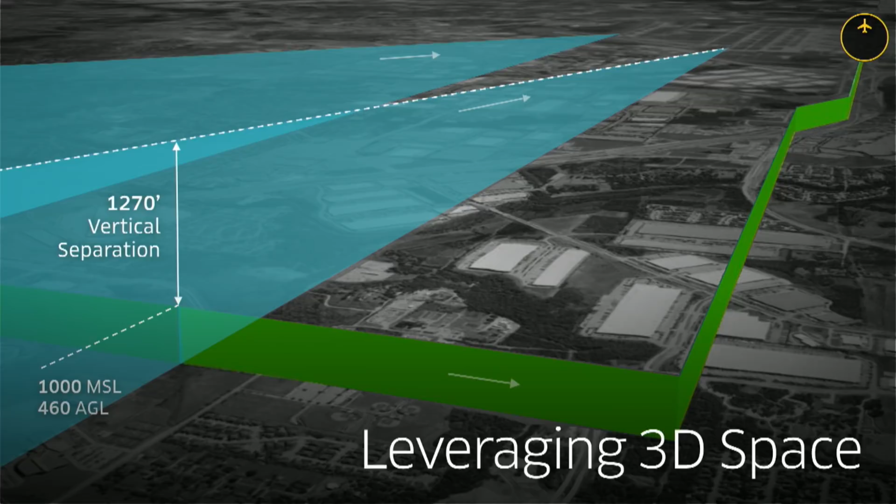And that turns us to 3D space. We need to compete against cars both on cost of time and on money. So autonomous vehicles will be able to reduce the cost of the trip on the ground, but we will not be able to really attack the time cost savings. The only way to do that is to look 3D, because roads are inherently two-dimensional, and they already use up super valuable real estate and are constrained. So opening up to the sky cracks this geometry problem, because you can both go horizontally and vertically.

Doing this is also doing it in a smart way, because the air travel that we're imagining is capital light. If you think about it, in 1993 the 105 freeway opened here in LA to serve LAX. Planning started in the 1960s. It cost $5 billion in today's dollars for about 17.3 miles.

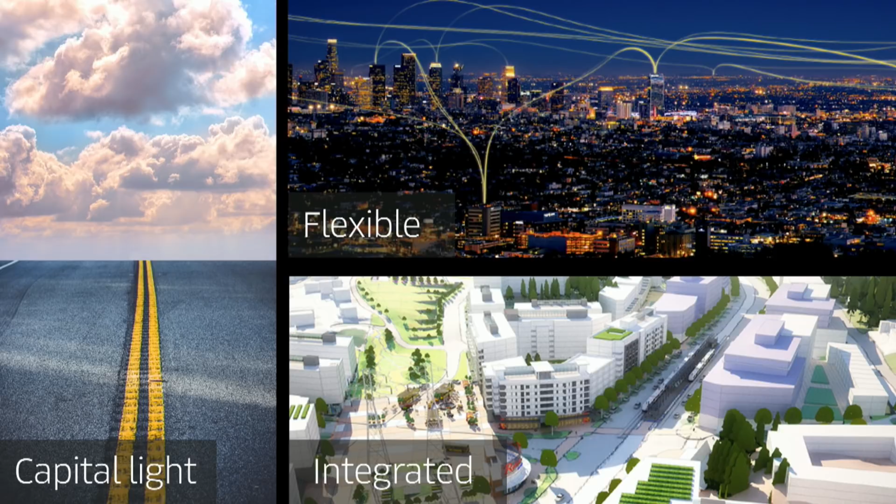Unlike roads, air doesn't require construction or maintenance, so it eliminates the need to build that out in that same way. And skyports can also be developed faster, as part of real estate development, and can be done in a decentralized manner, slowly building up, and you continue to accrete value.

It also inherently integrates land use, by having the skyport built in with the commercial or residential real estate. So we can change rooftops into parking, we can change the parking on the ground into parklets, and we can have a much better use of land space.

And finally, it's very flexible. Cities are constantly changing. They're complex. It is tough to predict what neighborhoods will become big next. And so we can adapt very easily without having any fixed routes. It also allows us to invest in neighborhoods where we think there might be a potential for growth in a lower risk, lower capital way.

This increased bandwidth will have major implications. We will have longer trips. People may be willing to be induced out of their cars and share in the sky because of the time savings. Also, when you compare our model of air travel, it's always been shared. And if you look at larger commercial aviation versus this sort of vehicle type of travel, it will be much nicer. We'll unlock people's productivity lost by congestion.

People who have been priced out of the city as real estate prices continue to go up will continue to have access. Mega cities, which are getting sprawling and more congested, will have connectivity. And medium-sized cities that are near each other will be able to be linked in ways that will allow them to function like much larger urban areas.

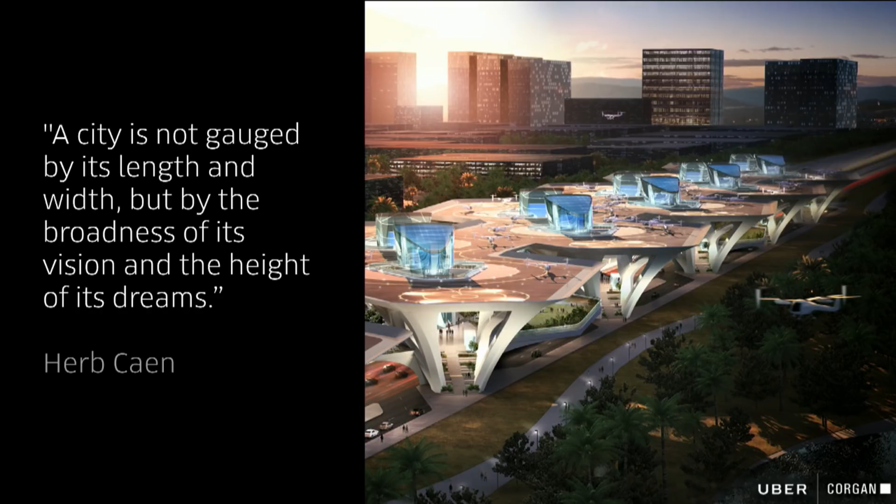We're not looking for tax breaks or local incentives, just identify a city with a strong vision who is investing in their future. So if you know of anyone who might be interested, or if you're a city yourself, we will be publishing all of this information at uber.com/air. And we want to hear from you either to our local policy team or to the Uber Elevate team directly by July 1st. And we're really excited to start that conversation globally.

With that, I want to change gears and introduce our next session, the Lightning panel session. We've talked to you a little bit about how we, Uber, think we can help cities, but there's so much opportunity. And what you'll hear from our next 6 fantastic speakers is their vision of how aviation technology, new mobility solutions will change and help cities in a variety of different ways. So with that, I'll turn it over to our next speaker to each share a 5-minute vision about what they think that world can unlock.

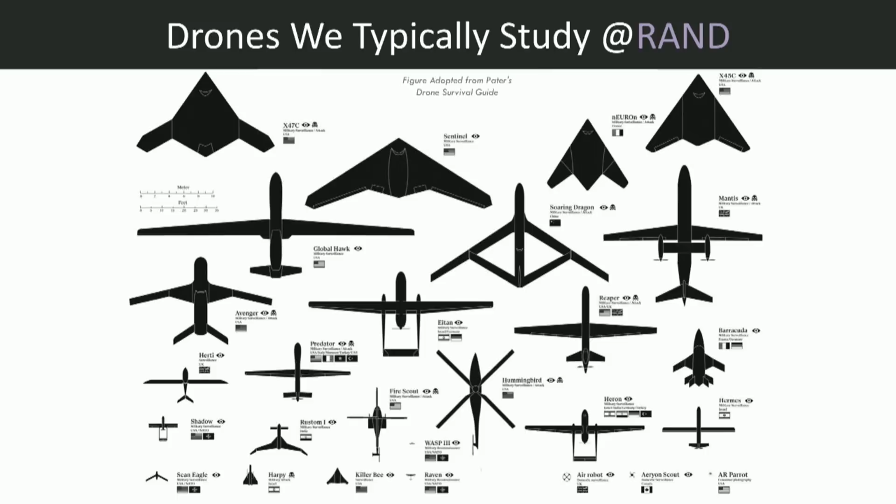And one of these topics that we've decided is important to look at is drones. That's why we're here. And RAND is most famous for drones like these military drones. Over the last several decades, we've done a lot of work there. But obviously, everyone here knows that these urban mobility situations, delivery drones, which we're going to focus on in this talk, but then eVTOL as well, are becoming important realities and issues that

policymakers need to address. And so some of those issues are the design of the drones, the logistics and the operations, the airspace issues, and potentially privacy issues. But we have small reports on all of these that we've put out. I've specifically worked on the operations, so that's what I'll talk about today.

And the way that I went about that, it wasn't originally set out to be this, but it ended up seeming that making mathematical equations was the best way to address these issues. And so these mathematical equations incorporate things like the ground transport and the aerial transport, and then we validated as much as we could with the data that was available to us, far less than obviously what Uber has available to them.

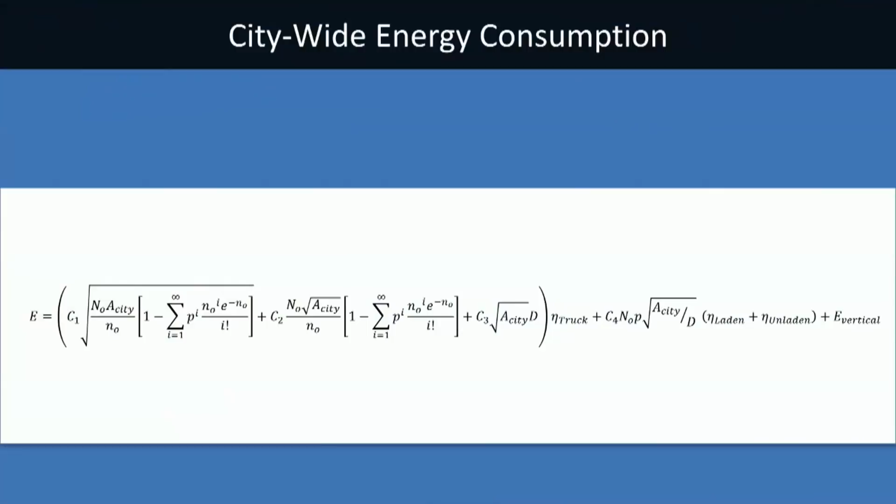But the first issue that we wanted to address with these equations was the city energy consumption for delivery drones. If delivery drones can proceed at this scale, then what sort of energy would be used as compared to the current status quo? And so we get these big, long equations. This one's kind of condensed, but it's really not as bad as it sounds. It's all the stuff you would expect, things like the trucking distances and the energy to restock your drone centers. How far do the drones fly, vertical lift, efficiencies on the drones.

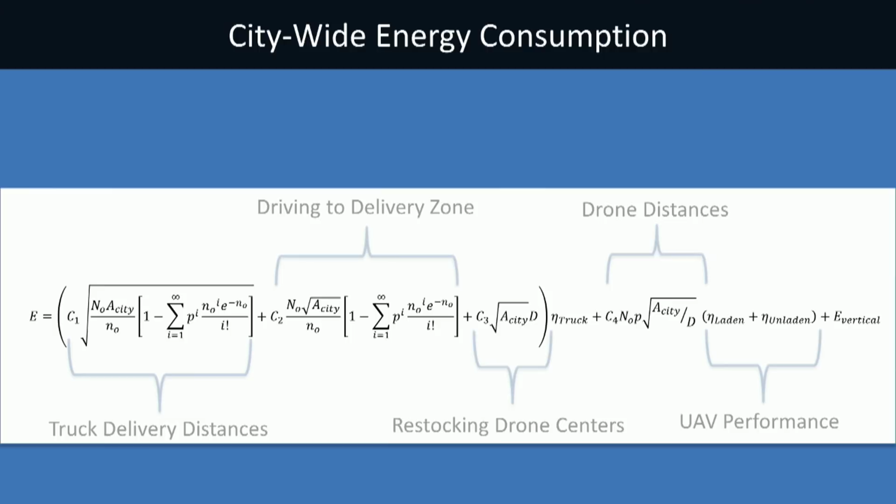And so the interesting thing here is that it tells you what the important variables are for policymakers. If they're concerned about something, what are the variables they can tweak to have the most impact? But it doesn't tell us the scale, and so in order to understand the scale, we applied this equation with some rough inputs that correspond roughly to a variety of cities: Los Angeles, Tokyo, Kigali, and Minneapolis.

And then we can take a look. You just plot the graphs. This is the fraction of drones. So as you scale up the percentage of drones delivering in these different cities, what are the impacts? And what we're seeing, originally I was pretty skeptical. I didn't think this was going to be possible.

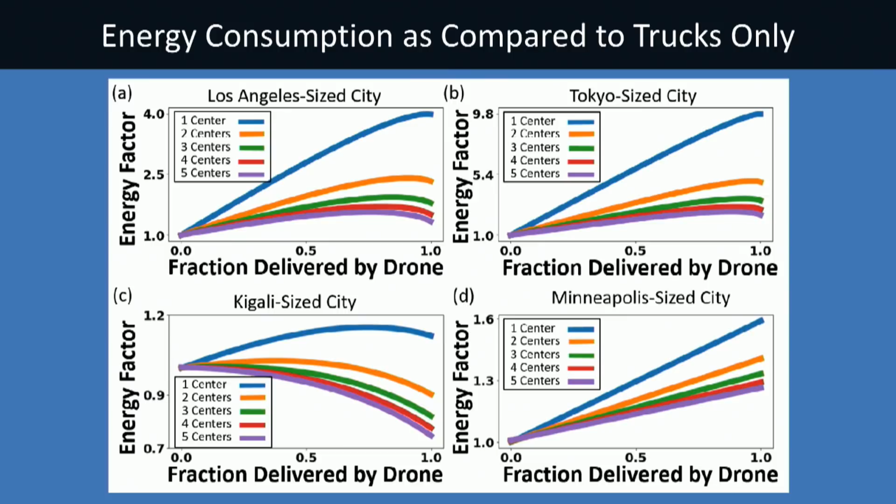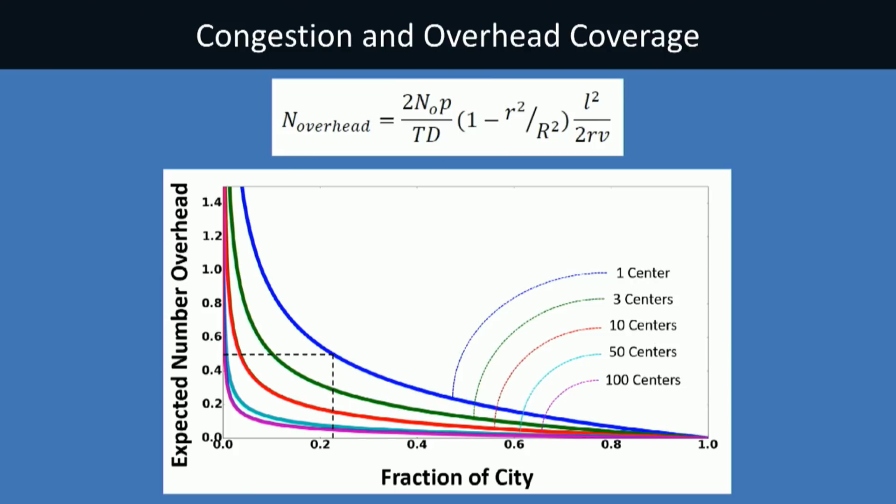And so what we're showing here is the fraction of the city that will have some number of drones expected at any one time within their viewing radius. And we're talking about, for a city like LA, maybe a quarter of the city will have a probability of like a half of a drone overhead at any given time. So certainly not blocking out the sky. As you get closer, it'll be higher. And then obviously, what I'm showing here is that if you increase the drone centers, that helps again to bring down the overhead coverage.

And so just to wrap up really quickly, there are a variety of things. First, we really believe that just rough first-order analysis like these can help give policymakers an understanding of what the scale of the problems are, understand what are the issues and what things are not actually issues to deal with. We're showing that delivery drones appear to make sense in at least some environments, and maybe in all.

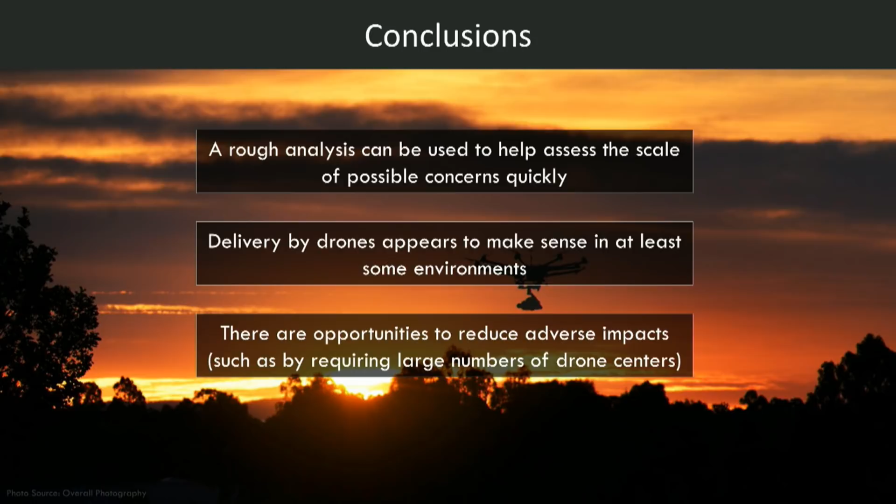And I'd like to reiterate that this approach, these equations, can help to identify what are the real impacts from the things that are not, what are the options that policymakers have, and what will be the impacts on people, on the folks like you. And so what we're trying to do, this is all delivery drones, we're trying to extend out to eVTOL and people movers. The same sort of analysis could be very useful.

The policymakers will know which issues are important, which ones are not important. They can say which variables to change in order to address those issues. And they'll also know, if they make those decisions, what the impacts will be like for people who are trying to design the aircraft, design the batteries, design the skyports.

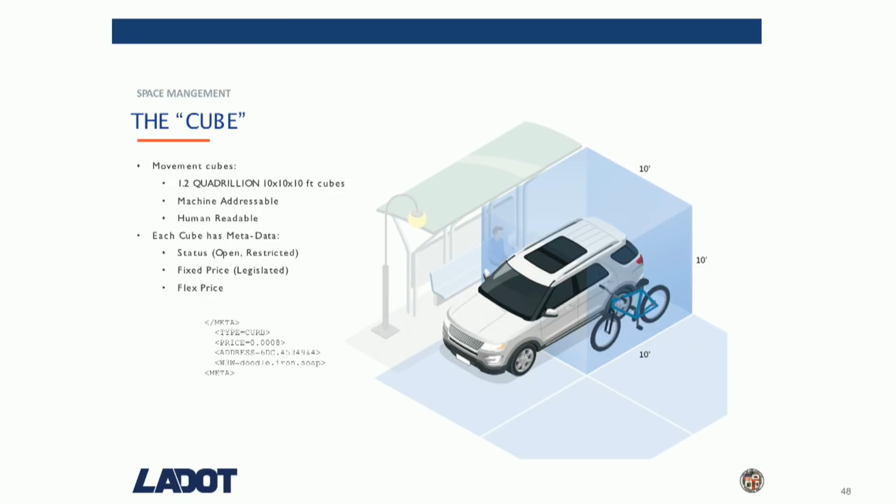We have to have a completely different map of the city and a completely different idea of the role of the DOT in the 21st century. The Department of Transportation cannot just deliver infrastructure. We have to think like a product company, and we have to think differently about public right-of-way that will now extend from the ground under your feet all the way up to 2,000 feet in the air. The FAA may let you fly, but it's cities who will let you land.

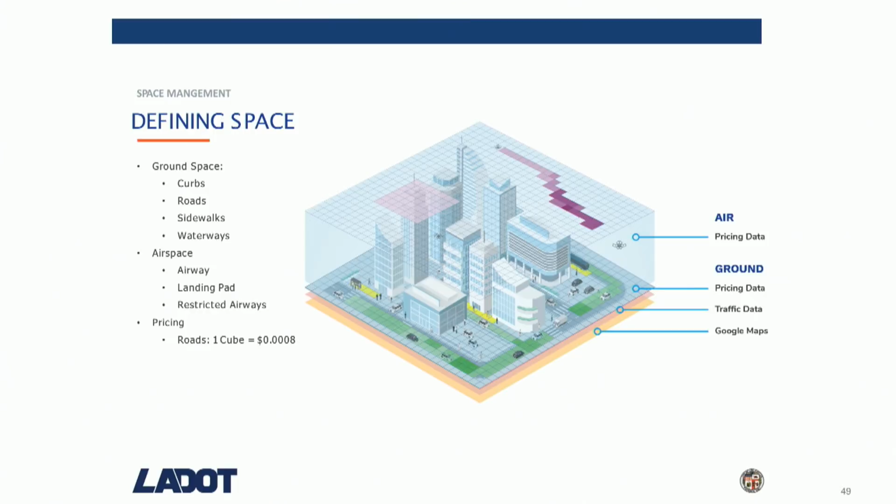And as we think about code as our new concrete, the opportunities to solve real problems and real challenges only open up if we are at the table together and talking about these incredible opportunities in front of us. The other problem we are trying to solve is safety. 260 people died last year on the streets of Los Angeles, streets that I manage and operate.

We look at the incredible track record in aviation and think about the opportunities. We ask ourselves, why is this so? Well, it's because in the 40s and 50s, in order to usher in the arrival of the jet age, the FAA was created for pilots by pilots. Safety is not a feature in the air the way it is on the ground.

And the opportunity here is to hold the bar high and to usher in the autonomous age, not just in the sky, but on the ground, by making sure that every time there is an incident, safety knowledge is not tribal, but becomes a community responsibility of all of the people in this room. Our opportunity here is really to get the things that we love. More kids playing in the street, growing up, and inspiring the pilots and the passengers of tomorrow.

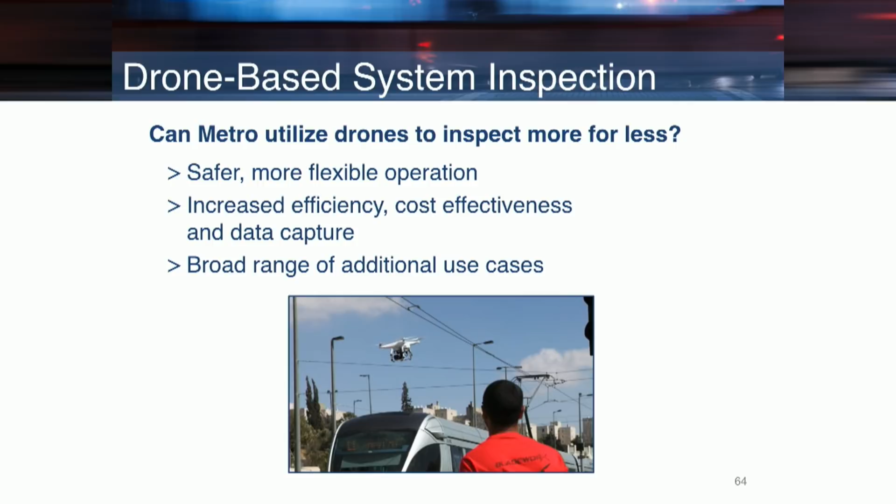And so what we've done is we've created an internal training program to train our own staff to use drones in order to inspect our stuff. So just a few ideas that we're doing.

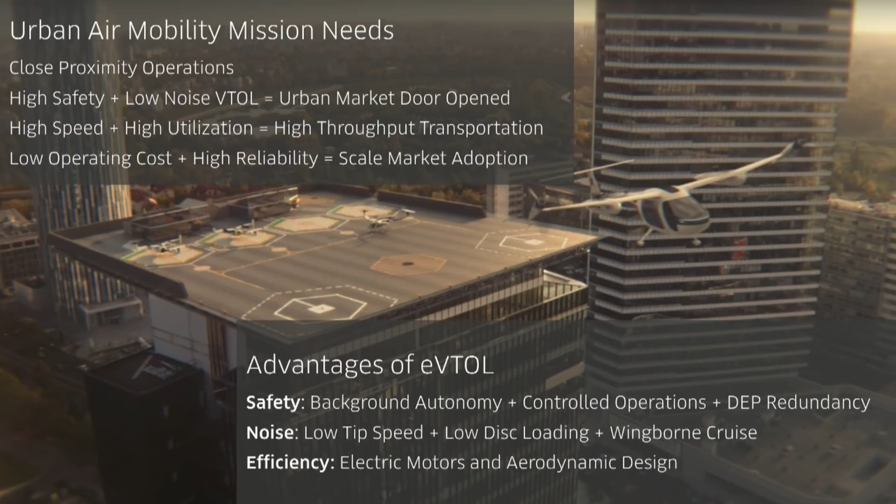Safety, you really can't talk about the vehicle safety by itself. You always have to talk about the operational construct. 70% of the accidents are relevant to the operations or the pilot themselves. So you've got to take on more than just the vehicle.

About 20% of the accidents relate to mechanical failure. So that's where this distributed electric propulsion redundancy really is a game changer in getting rid of that 20% of mechanical failures.

On noise, I'm showing you the simple things that everyone's doing who's trying to really be a low noise solution. There's so much going on under the hood, though. And in the next year or two, as companies start to come forward, you're going to see that they're doing much more than this in order to really embrace this ultra low noise signature.

Efficiency, my last comment is, I actually like it that we have a severe energy constraint because we have to design these vehicles on a diet to be really, really efficient. And my concern is that if companies push to hybrid electric right from the beginning, then they don't have to take that energy constraint seriously.

For us, we are all about all electric, battery only. We're not embracing hybrid, and there's many good reasons as we get into the discussions why we're doing that.

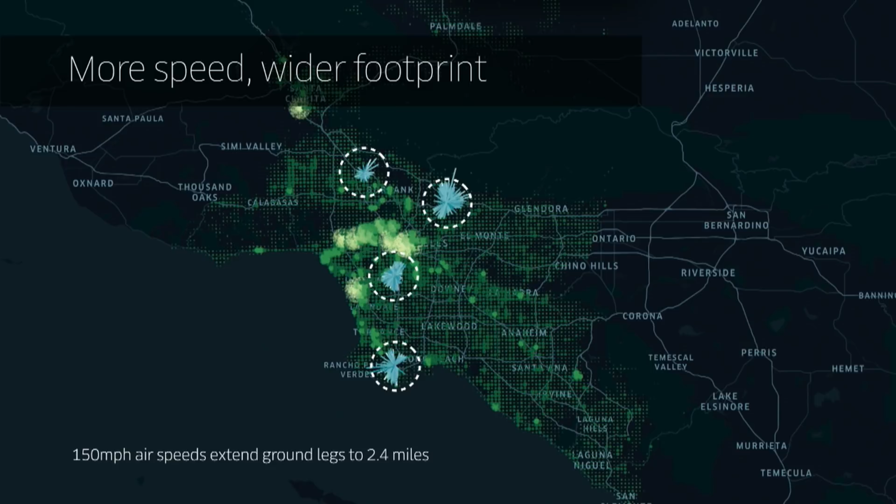So with a 100-mile-an-hour vehicle, you can pull from only about a mile around before the time savings you get would be just better served on the ground. But by going to 150 miles an hour, we're able to more than double that radius. And when we double the radius, that's a 4 times factor in the area we're able to pull from. Getting that density of trips around those nodes is crucial to providing high load factors, which is really going to be the main driver if we're able to provide this affordably at scale.

At lunch, our head of operations, Stan Swaintek, will dive more into why affordability and demand are so inextricably linked. The other couple of requirements we have here are noise and bird strike. Those are other examples of requirements where we're going above what regulations require based on the unique parts of our mission. And so we're designing the vehicles and the requirements to optimally serve our 75+ million users.

To develop these requirements, we've done both technical and non-technical analysis to really understand what's going to best serve this network. One of the things we've done is looked at payload distributions, passenger weights across the US including baggage, and run Monte Carlo simulations to figure out the most probable as well as the most extreme loadouts. At the same time, we've surveyed thousands of our riders to figure out how they would feel about being weighed at the vertiport and what their preferences would be around that.

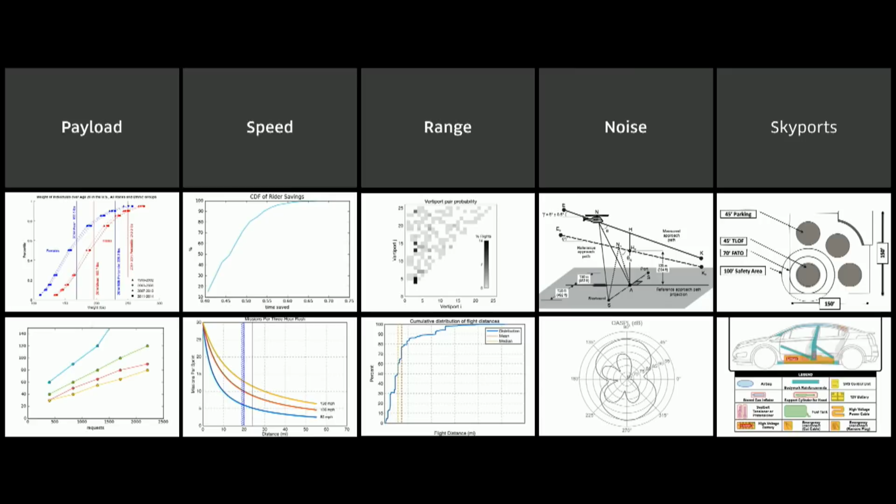We've also used our Flux Optimizer tool that you learned about on day 1 to really understand at a network level what load factors we think we can achieve and how different parameters such as speed and range affect that.

As you heard from Rob on day 1, we're providing the substantiation documents as an exclusive benefit to our partners on the Elevate network. But in order to move this entire ecosystem forward, we are releasing a public version of these requirements. And this document was crafted in the spirit of the Elevate Common Reference Models that Ian will tell you more about later.

The purpose of this is to show the government, academia, and all of our partners what our vision is, and allow the entire ecosystem to be pushing towards a common shared vision and have all the results driving us forward.

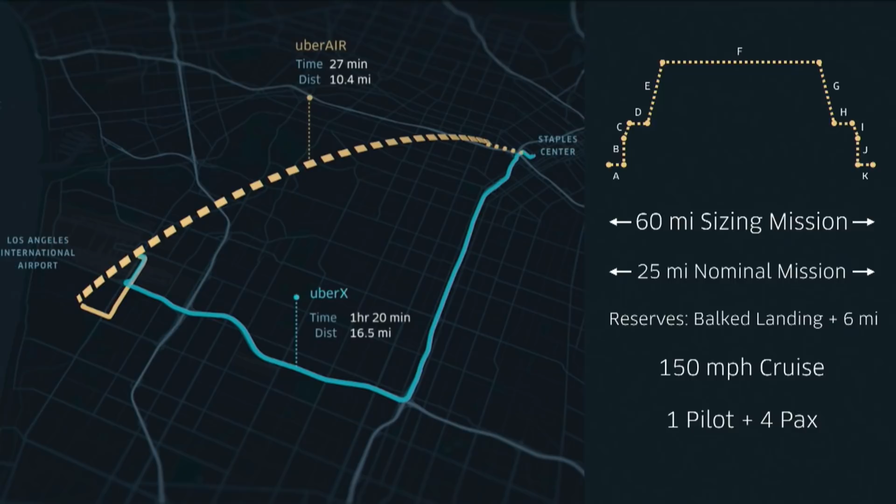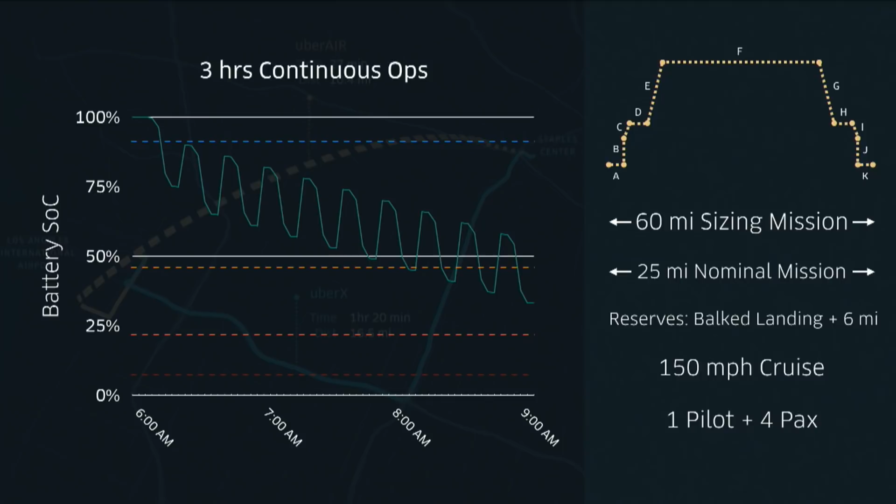So we look at a constraint plot here that looks at how the network design is linked to the vehicle design. We look at the repeatable mission distance, which is our average mission across the network, and then the vehicle design in terms of how we size our battery. So we looked at our ECRM 003,

and what we did was look at how the range influences what size of vehicle we can build. There's a minimum battery size to meet the range, but it really gets interesting when we apply our repeatable mission distance and time. What this does is it says: how do we design our network to best serve the vehicle's capabilities, and how do we design the vehicle to best serve the network?

So we start to understand where the feasible design space is, and Ian's going to tell you more about how we've explored that design space.

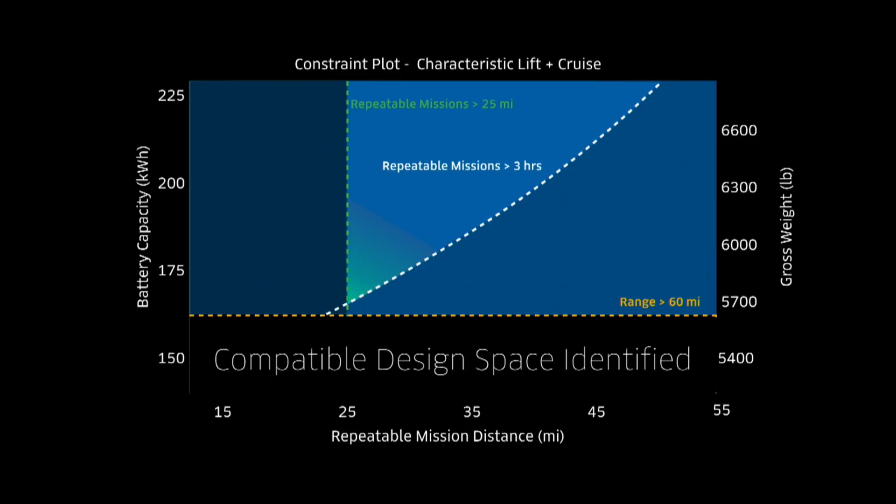How's it going? All right, thanks, Ian. Cool. Oh, sorry.

Thanks, Adam. So as you see here, we found some compatible design space using a zero-order tool. Now we'll dig into the ECRMs, how we actually go from requirements into a vehicle, and really validate that the requirements make sense.

But before we do that, I think it's really important that we look at current concepts, existing concepts in the space. It's really important to contextualize and understand what these concepts are capable of, and to really understand if the vehicles that exist today meet our market demand requirements. And if they don't, they tell us what we need to change in a vehicle that would be optimal for the Uber network.

They also just give us better design insights and understanding of how the ecosystem is viewing the problem, how they're integrating technologies, how they're approaching different things.

So we're looking at several concepts. I'll show a few up here. We're looking at helicopters, lift plus cruise configurations, and tiltrotor designs. So let's start with the lift plus cruise configuration.

It's a representative Kitty Hawk Cora. As you can see, it has optimized VTOL rotors. In terms of the complexity spectrum, it's on the lower end. They've had a chance to really optimize the tilt and cant angles of those rotors, and that means it's very controllable in all phases of flight, which is really awesome. They're doing a great job there.

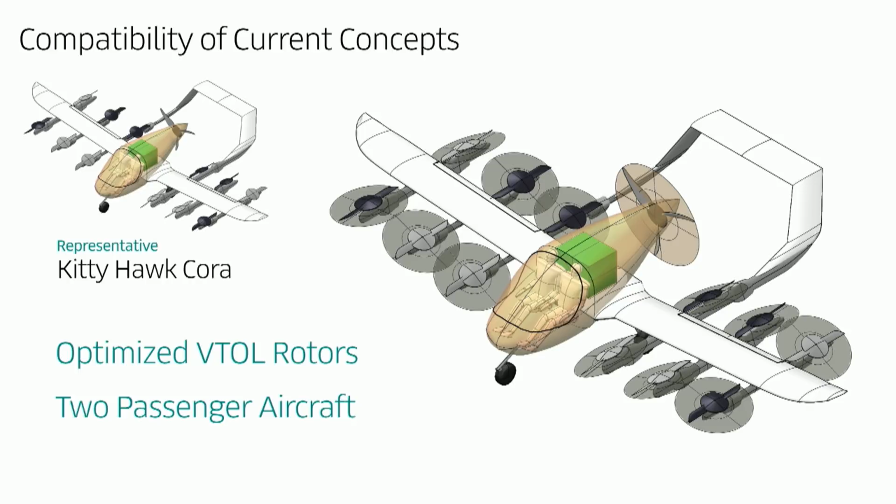You can also tell from this image that it's a two-passenger aircraft, and that means it can't be piloted and meet the throughput that our market demands dictate. And lastly, you can tell from this high aspect ratio wing that it's not going to move at the 150 miles per hour that our market says it should to meet our riders. In fact, if you do the in-depth analysis, you see that the L over D max is probably closer to 90 miles per hour.

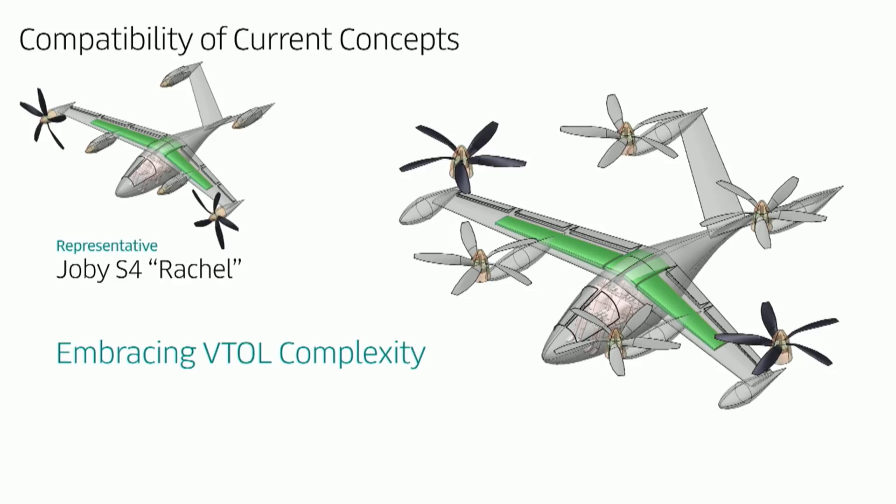Moving to this tiltrotor concept, we see that they're embracing a lot of VTOL complexity. In cruise, they have two tip-mounted propellers rotating, but in VTOL, you have these inboard propellers that tilt upward and provide thrust and lift. That's really cool, right? That's something that would only be possible had you put in the engineering hours and really dug deep to do the right motor design and get the actuation

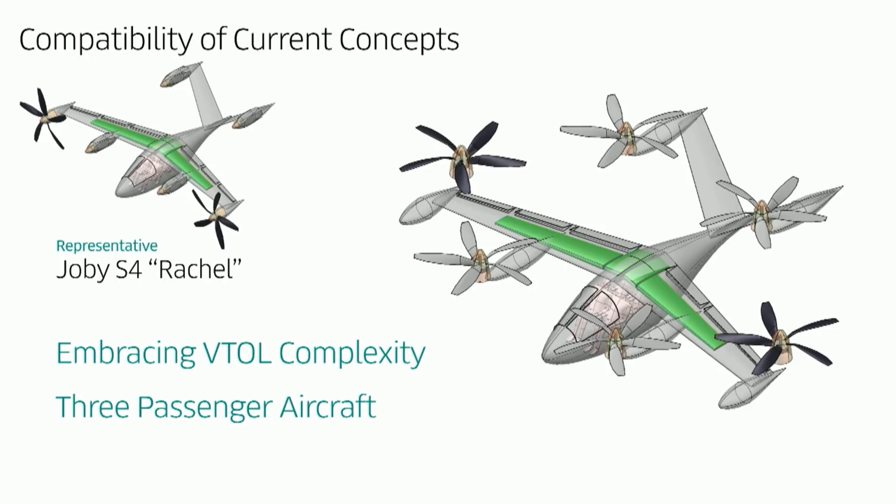concepts refined over time. It's a three-passenger aircraft, so it's piloted, very much in line with where we're going, but not the four passengers that we've seen. And it's a pretty clean configuration, 200 mile per hour max speed, and its L over D max is probably close to the 150 miles per hour that we're going for. But wouldn't it have been great if there was a fifth seat and it really met all the market demands that we project and Adam just told you about?

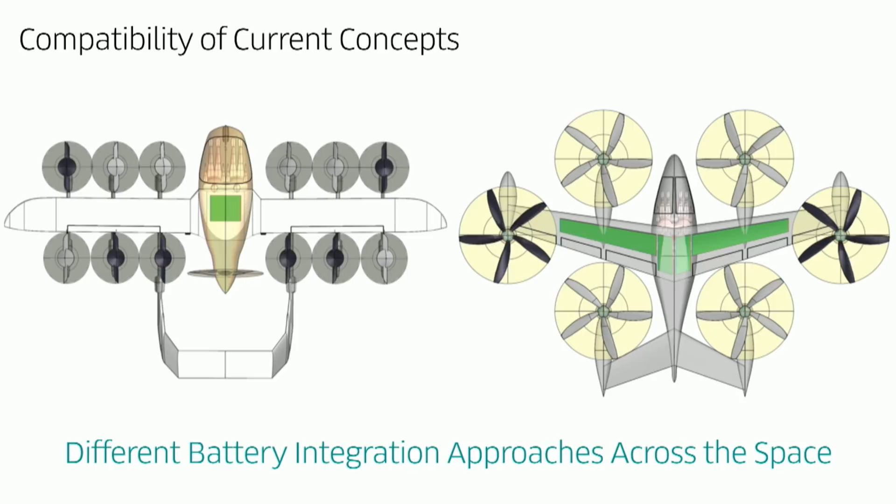So we can then start comparing different concepts in the space, and we learn a lot. The lift plus cruise configuration has a battery that's compact in a sort of cube pack. But if you look at the tiltrotor, we see something that's integral to the wing, probably utilizes pouch cells, and they're going for something super dense. So it's clear that looking at the ecosystem, we haven't reached a steady state where we understand what is the best way to integrate a battery. What is the gold standard for eVTOL design?

Because of this, we at Uber thought it was very important to ground the industry, anchor it in concepts that we could all use and learn from, that we could all discover and see and prove out through various analyses what makes the most sense. And so that sort of framed our ECRMs, our Elevate Common Reference Models. Let's dig into that.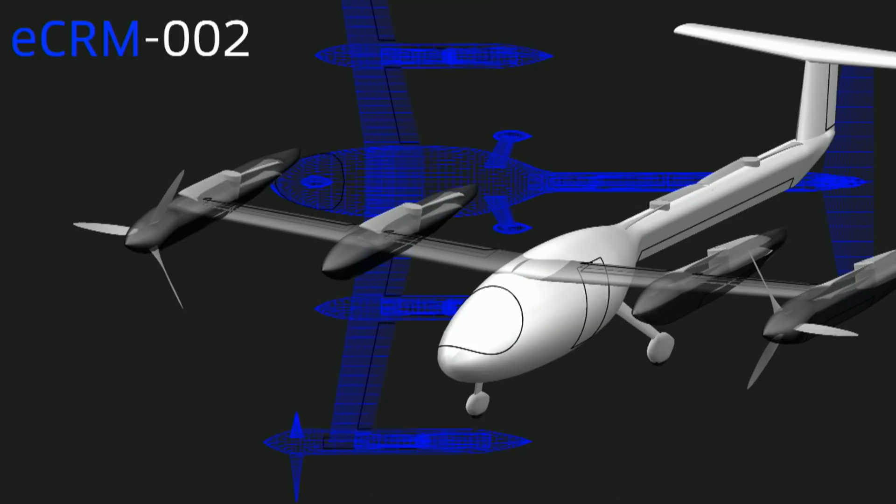From ECRM 001, we then went to ECRM 002. It's very similar, you can tell there's a lot of similarities here. But instead of tilt rotors, you trade a little bit of the actuation for more weight and a separation, decoupling between your lift and cruise propulsors. An interesting fact here is also that the batteries are mounted inside the front portion of those nacelles.

And then most recently, we have ECRM 003. You guys got a really nice look at those yesterday, thanks to Mark and Rob. But I want to dive a little deeper into this one and really show you the sorts of analyses—we can't go into all of them—but the kinds of analyses we do to ensure that, at least at a first order level, they make sense with our requirements.

So from the nice rendering, we go now to a cut of the OpenVSP configuration. And so the design intent here was to kind of trade, to see the effects of wetted area and safety, as opposed to a much more streamlined design in ECRM 001, 002. We want to look at a variety of concepts.

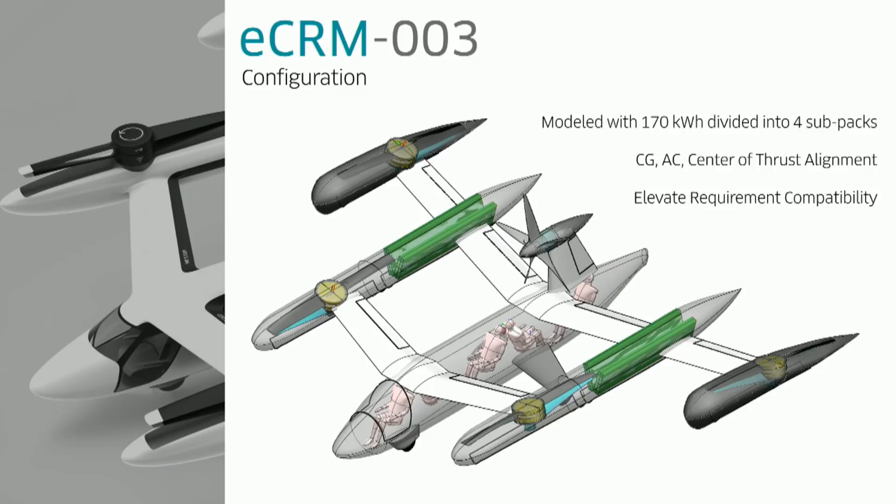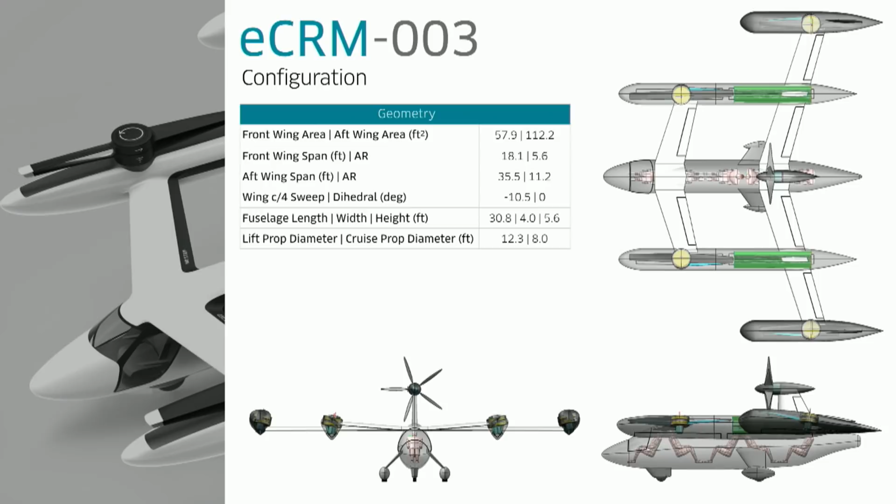And so here's another shot of the OpenVSP model. Everything's in OpenVSP. The really great thing about OpenVSP is that it's parametric. It allows us to tie into a bunch of analysis tools. And we can really understand the effects of changes in the configuration quickly, because we can develop a tool chain around that and script up various analyses, like mass properties.

So here's a weight statement that we developed for this model. It's an in-house weight modeling capability based off of a composite of various weight regression methods. Like I said, it's tied to the VSP geometry, but we're also doing tops-down and bottoms-up assessments. So as we learn more about components in the space and get more size, weight, and power information, we roll that in so that we're getting more accurate weights.

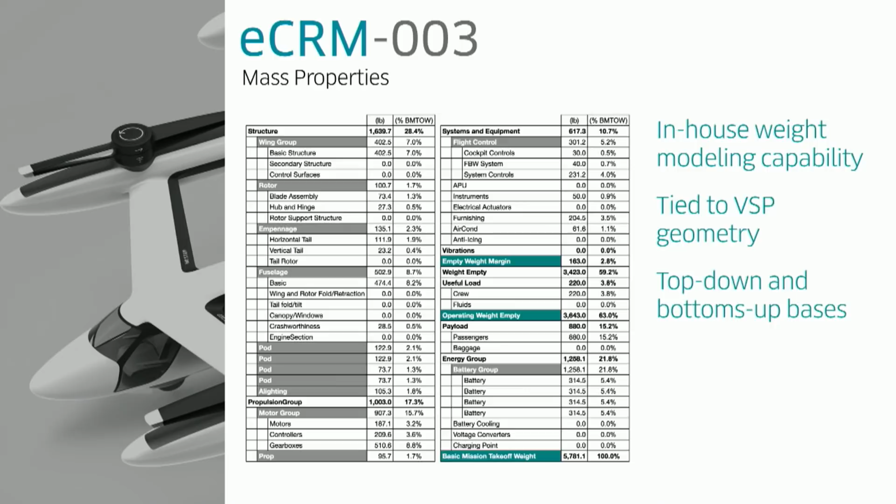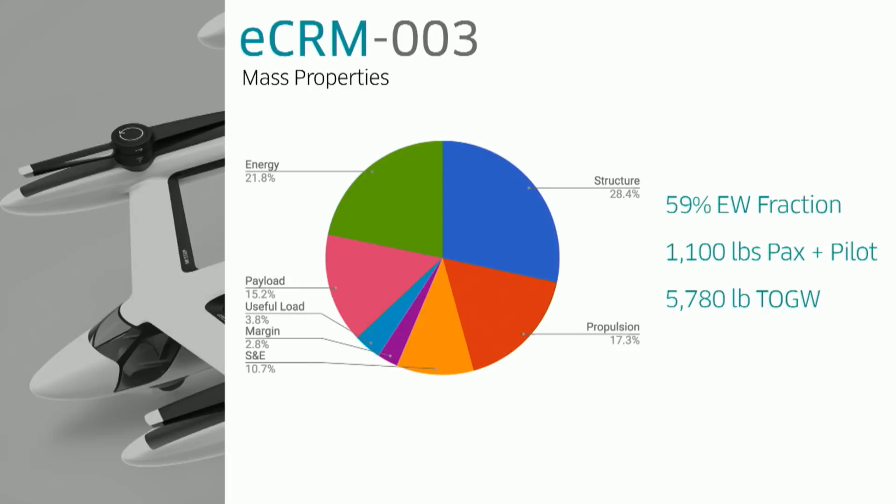And so to zoom into that, there's a pie chart basically showing the breakdowns. It's got a 59% empty weight fraction. We're assuming 1,100 pounds for the passengers and the pilot, and overall 5,780-pound takeoff gross weight. And so you might be thinking 59% is a little high, right? But then immediately we look at the regressions, and it actually correlates with other light civil aircraft.

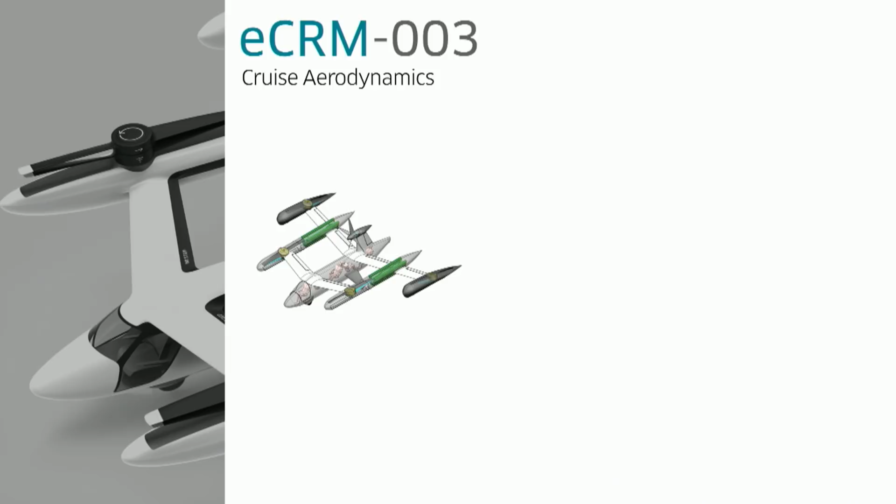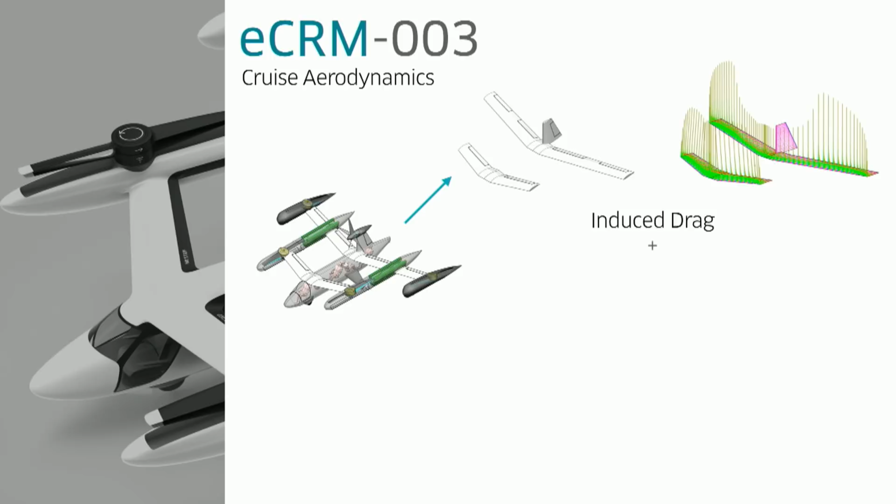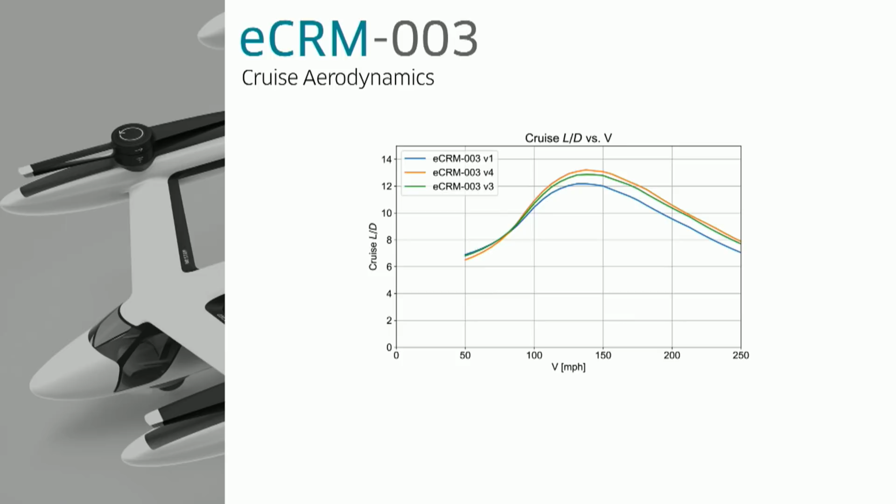The same way we streamline our analyses with mass properties, we do the same for cruise aerodynamics. So from the OpenVSP model, you can generate a set that you can then take into your induced drag tool of choice. Here, you're looking at AVL. And then you can pair that with the parasite drag buildup tool from OpenVSP itself to then go to a drag buildup. And so what we're visualizing here is L over D versus speed. And at least for this configuration, while there's a lot of wetted area, you're still able to achieve high enough L over D around the speed range we want, that 150 miles per hour.

And so, like I said, because it's parametric, you can iterate on the design. So you see a few different curves here. And so as we've optimized sort of the twist distribution, changed the wetted area, thinned up some of the nacelles and the fuselage, you see the L over D increasing, but still in that speed range that we're looking for. And again, we always want to make sure that we're not unreasonable. So we go back to the correlations and we see it looks reasonable.

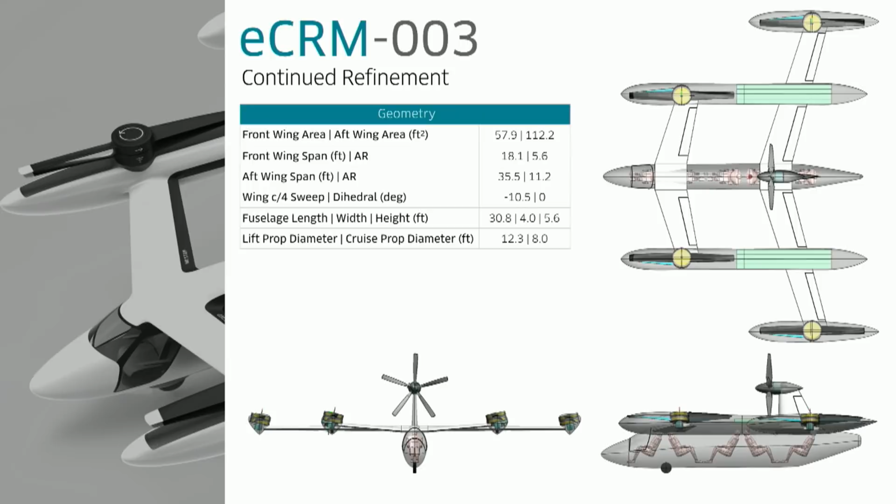And so here's sort of a visualization of how it changed, right? You can see we thinned it up. We'll do it a few more times. You also might notice that the cruise propeller changed. We're doing those analyses too, just there's not enough time. And so going back to the constraint plot that Adam showed, there's ECRM 003.

So they're available now. We're really excited about this. Never before has it been this easy to push a button, get an eVTOL design. So if you go to our webpage right now and you hit ECRM, you'll see this screen. You click, you get it, and we'll have a white paper coming soon.

So some of the main reasons why we have ECRMs, just to sum up: tools validation, requirements validation, technology validation, reaching out to new stakeholders, and encouraging comparative assessment. So we've seen a really great relationship so far with these partners, and actually we've had a lot of success in academia. So those of you in academia today, please reach out. We'd love to engage you.

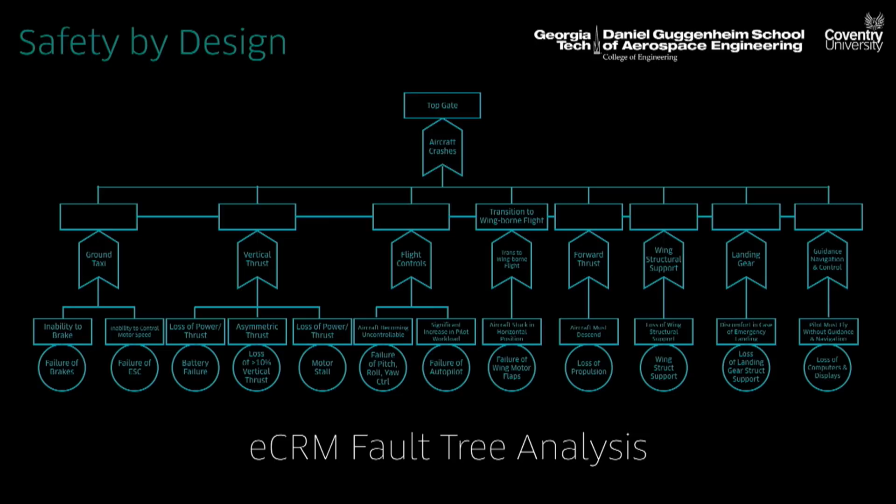We've had a lot of success with Georgia Tech and Coventry University through their Safety by Design class. Here's sort of an example of the fault tree analysis they conducted as part of that class for ECRMs 001 and 002. And they really went the extra mile and dug deep into an abbreviated Petri net analysis.

Oops, a little bit early.

Can we get that back up there? There we go. So they were able to break out into the different systems, subsystems, components, and do the stochastics and understand a little bit more about failure rates and what it takes to design these eVTOLs safely.

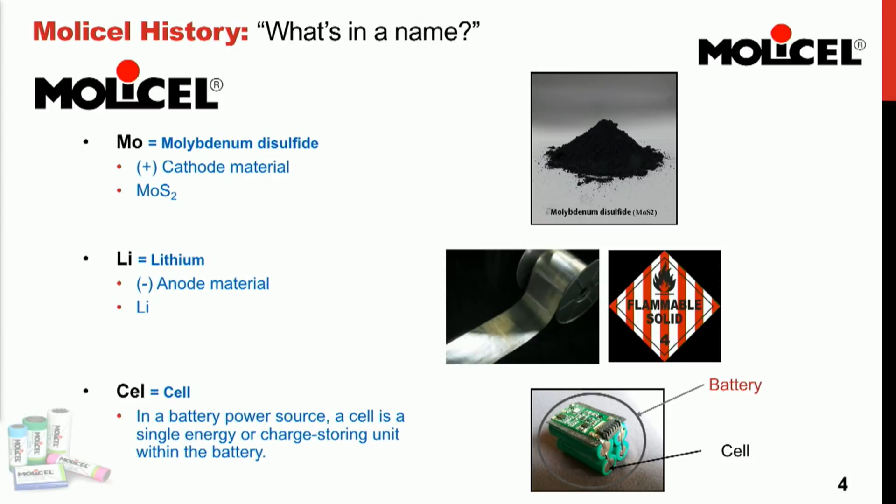Just quickly, what's in the name? As I mentioned, we came from lithium metal technology. The technology we used at the time was using a MoS2 cathode, molybdenum disulfide, and a lithium metal anode. The cell part speaks for itself. So that's where the name Molicel comes from.

Our locations are in Vancouver, BC, where I live and work, in a little place called Maple Ridge. We also have manufacturing in Tainan in the south of Taiwan near Kaohsiung, and in Taipei is our head office. As far as our manufacturing facilities go, in Taiwan we have a 637,000 square foot manufacturing facility, and with about 500 people, it's currently manufacturing 4 million cells per month. We're just installing some new capability, and we'll be up to 8 million cells per month at the end of the year. We'll talk about that a little later.

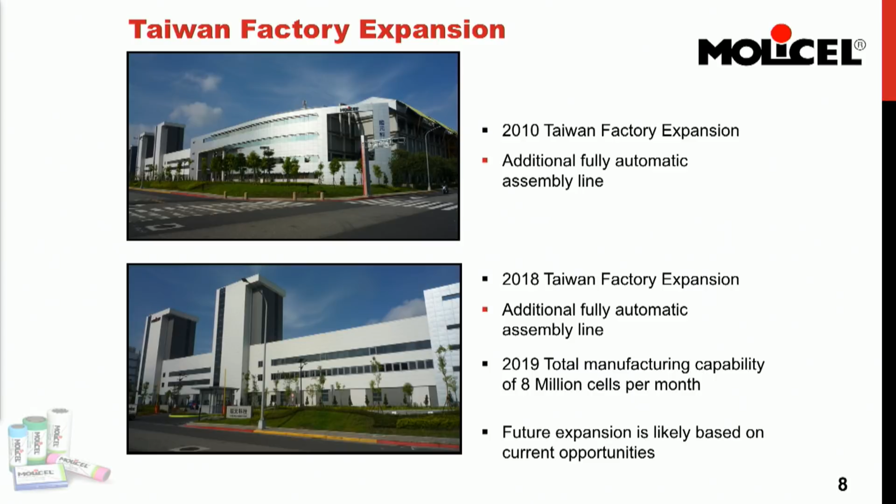So that when we want to expand the building, we have infrastructure in the building of the elevators to build out more manufacturing capability. So this year, we're just adding an additional high-speed assembly line. We'll bring our manufacturing capability to 8 million cylindrical cells per month. Based on the demand, and it's extremely high right now, we do anticipate that we will expand additionally in the future.

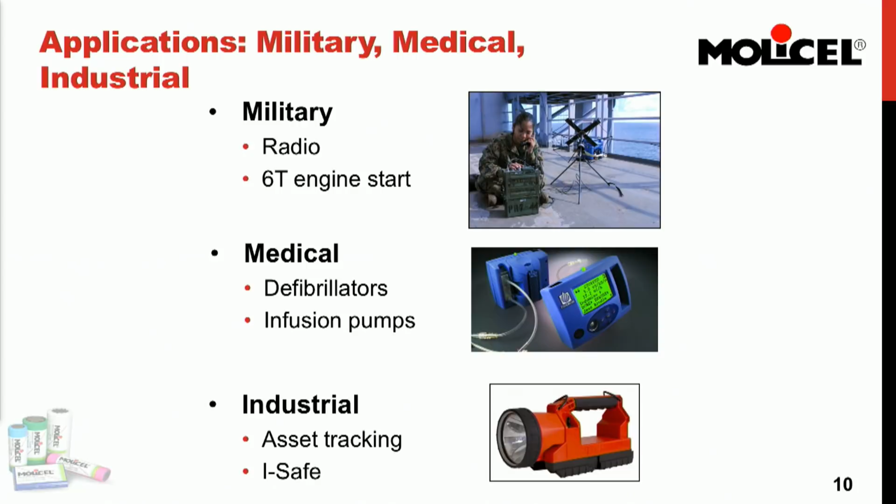The markets that we're typically in: consumer electronics, military, medical, and industrial. I'll just quickly go to the next slide. Military radio, the SINCGARS radio. We were the first company approved to use lithium ion in the SINCGARS radio for the US military and other military services. The 6T engine start battery is used to start tanks and personnel carriers. This is a new application for lithium ion, and we're currently in that.

In the medical industry, defibrillators and infusion pumps; this includes class 3 medical, life-sustaining medical applications, such as LVADs and heart pumps. And on the industrial side, asset tracking and intrinsically safe applications. Our cells can be used in mining and oil and gas for intrinsically safe use.

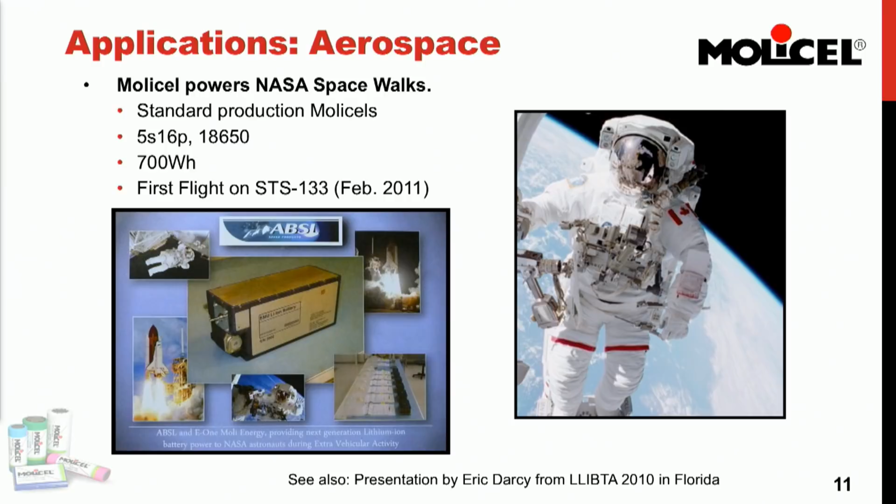When it comes to safety and reliability, probably the highest profile application that we have for our cells is the spacesuits at the International Space Station, which run on our 18650 2.4 amp hour cells. This is a standard product that NASA procured from us and proved through their COTS program, their Commercial Off-the-Shelf program, that lithium-ion cells are safe and reliable enough to be used at the International Space Station to power the spacewalks. This includes all of the systems inside of the spacesuits for life support, cooling, heating, and other life-sustaining aspects of the spacesuit.

It's a 5S16P 18650 battery, 700 watt hours, and it's been flying since 2011. This was a lot of collaboration with NASA and ABSL and their partners. They basically took the cells and did a lot of work to give them the comfort level that they could be used at the International Space Station, and they gave us the comfort level as well that they could be used in this application.

I think the important part about this application is that we didn't design a special cell for NASA. NASA used our standard off-the-shelf cells off the end of our assembly line and put them into this application. So fundamentally, our designs, our control systems, and our quality control system build in the quality and performance to be in applications like this.

Another application that we really enjoyed working on was the electric Mini Cooper with BMW. In this case, we actually designed the cells and assembled the modules for them. We're not actually a module assembly company, but when they asked us to do it, we took it on. It was a very large battery, 35 kilowatt hours for the time, and a lot of fun to drive. At the end of the program, if you come and visit our facility sometime, we actually have one of those Mini Coopers sitting in the atrium in our factory.

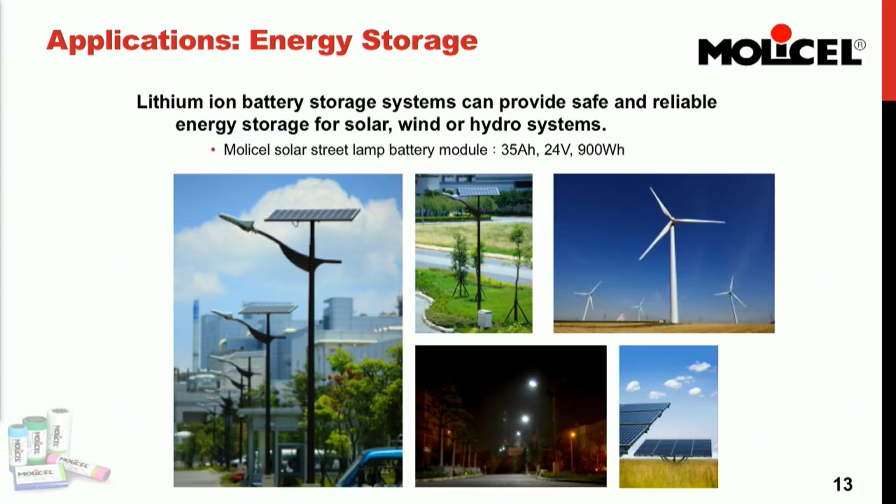The final application I just want to talk about here a little bit is energy storage. It's quite topical these days. It is very dollar per watt hour sensitive. So it is something that we're working towards, getting to the point where we can get our cells in bulk energy storage. In fact, these street lights you see on the left-hand side of this photo are the street lights in front of our factory in Taiwan. And those street lights are powered by a lithium-ion battery at the base of the pole, and during the daytime they are charged.

Hopefully that gives you a little bit of insight into who we are. I didn't want to take too much time on this presentation and talk about the technical details. There's going to be plenty of opportunity for that, but I just at least wanted to give you some insight into who Uber's partner is and what we do and what we've done.

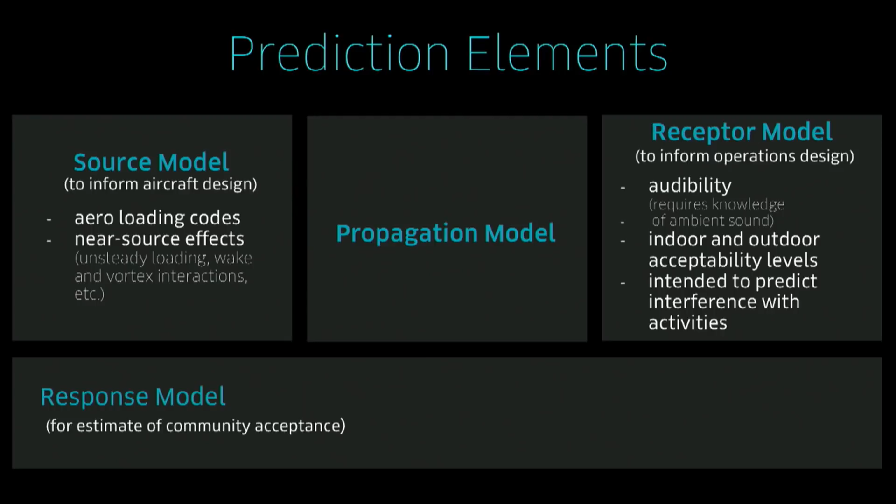It's exactly how the physiology works to determine what the loudness is. Josef Schlittenlacher will be talking about that in great detail at the end. And then finally, the response model, which is what people psychologically respond to. We have to analyze each of these issues separately and figure out how they come together in an integrated concept of how the community will accept aircraft as they develop.

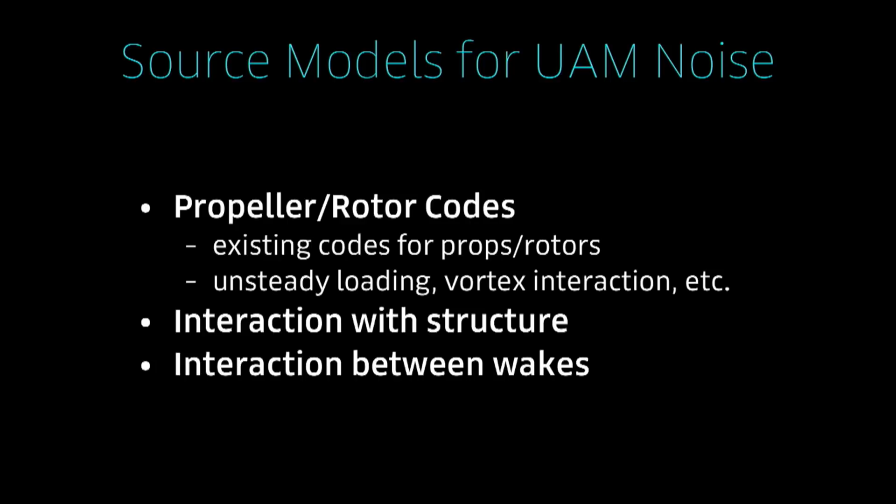I won't spend a lot of time on the physics of the source models. This is a very strongly developing effort. You'll have heard about work that Rob's team, the vehicle team, is doing on this, and a lot of it depends on development of tools that haven't been used before, because we haven't been building this kind of aircraft before.

The receptor models are perhaps the most important. Rather than an integrated noise exposure or dose, we're actually looking at the physiological portion of human response — how the ear works, how the brain works in processing those neural impulses.

We find that the work done on audibility of sounds in a background for other industries, such as broadcasting and telephones — where people want to know how objectionable a noise is when you're talking on the telephone — is actually much more applicable to our use case than some of the metrics that have been used before.

So you'll be hearing a lot more about that process. The response models are about the subjective portion of this whole issue, and that's a whole team effort.

Besides the elements that we control, such as the loudness of the sound, the duration, the time of day, the onset rate of each of these sounds, and the integration of the sounds that someone has heard over the day, we have their history. We have people's memory of what that sound means, and that's important.

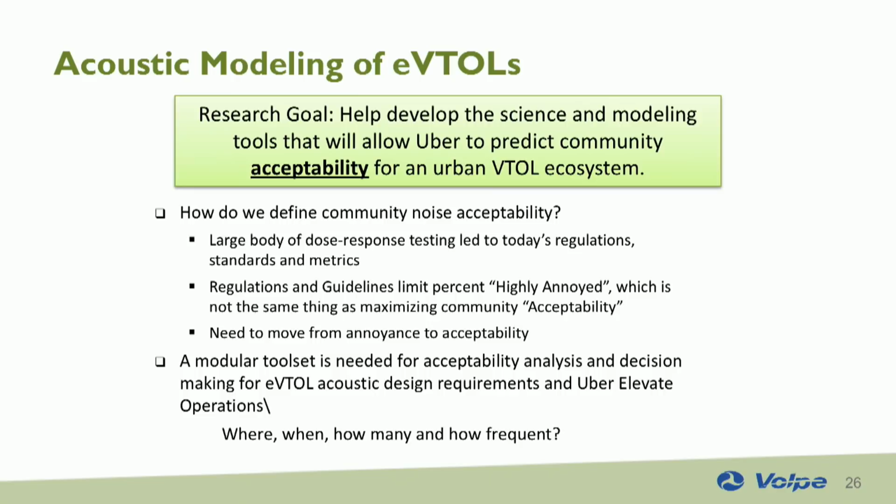One of the questions is, where should these fly? When should they fly? How frequent? What kind of noise are we going to be spreading around the community? How can you optimize and design around that to make this project a success?

So as I talked about audibility, we're using like the loudness as a... there's lots of methods for quantifying loudness, and we're not using loudness, we're using audibility and bridging more towards the detection end of the range.

Human hearing is able to discriminate noise actually below a background. If you have a tone, you can hear it, even if the numerical decibel level is below a background. It depends on the sound character, the quality, and all sorts of things. After me, Joseph will be talking a lot more about the human perception.

So one of the things that's important to bring into this is the uniqueness of each of these vehicles. They all sound quite different. You heard several different notional sounds today, and I'm sure all of the designers out there are coming up with even more creative vehicle designs that are all going to have their unique sounds.

And the question is, can we develop tools and methods to kind of capture the uniqueness of these vehicles under their different operating modes, whether they're taking off, flying en route, or coming in for a landing? So that's part of the challenge here.

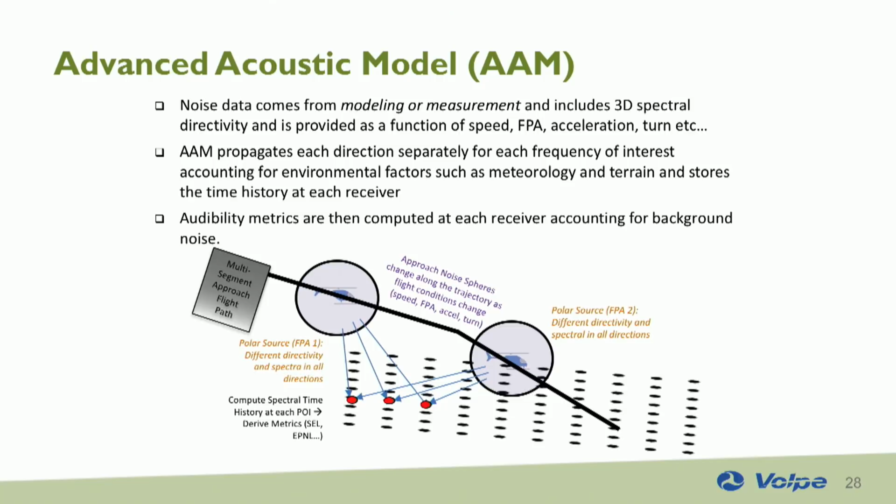And the point here is that the vehicle, as it's flying along, as a function of its operating state, its speed, its flight path angle, what its rotor system configuration is - lift mode, transition, forward flight mode, or what have you - it's emitting different sound characteristics in all different directions. So you can kind of picture a noise sphere around the vehicle, and it's emitting noise in all those different directions. And that noise has spectral information, tonal information, time-varying information.

So what you do is in the advanced acoustic model, you can simulate a trajectory, and at each point along the trajectory, you have this tonal noise emission, and it propagates it through the atmosphere, taking into account environmental things like temperature, winds, humidity, and so forth. And then you accumulate that sound in a time-based manner at a receiver, or a grid of receivers at a critical receptor.

And from there, you can then use your receptor module that Dave mentioned to compute any one of a variety of metrics. And the jury's still out what's the appropriate metric to use for this class of vehicles. But it's a modular tool to be able to do that. Here I'm just showing a couple of the information about a simulation I'm going to be showing.

Last year, I showed some information using a notional NASA eVTOL design. They gave us a little bit of data a year ago, so this is that old data, that NASA notional eVTOL. I just have a single spectrum, so I'm assuming it's an omnidirectional source, which is not real, but it's the only assumption we can make at this point.

Hopefully, ultimately, the designers in the room will be hooked up with computational aeroacoustics codes and can actually predict what the noise emission are for their vehicles, or when they have them built in their flight testing, you can actually empirically gather the source characteristics. So what I'm also going to show here is a Bell 206, a conventional small helicopter, and that includes all of the complexity of a real helicopter as a function of its operating state.

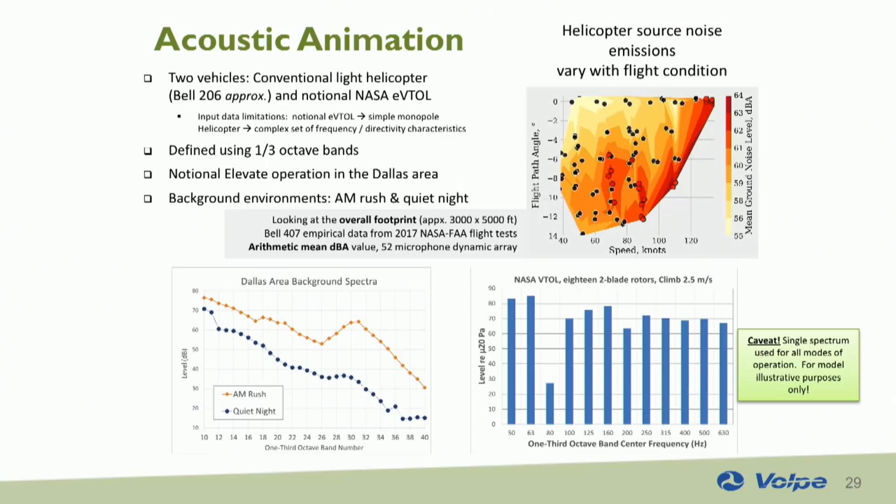So it kind of suggests to you that, for a conventional helicopter, there's a way to get from high speed, high altitude to low speed, low altitude for your approach. And there's probably an optimal way that you can fly and get from there down to your vertiport or your skyport. And so the designers in the room need to be thinking about this. How are you going to optimize your transition schedule from horizontal to vertical mode, and stuff like that. So this is a tool that we hope to eventually get into the hands of the designers, that they can be taking these things into account.

Okay. One of the other points that was made, and this is different from last year's, we're now going to try to take into account the background and compute audibility. So audibility, whether you can hear something or not, is clearly dependent on what type of environment you're in. If you're in the peak rush hour traffic, 6 to 9 in the morning, a lot more activity going on, higher background levels, it's going to be much more difficult to hear a vehicle than if it's at 10 o'clock at night and things are quiet and settle down.

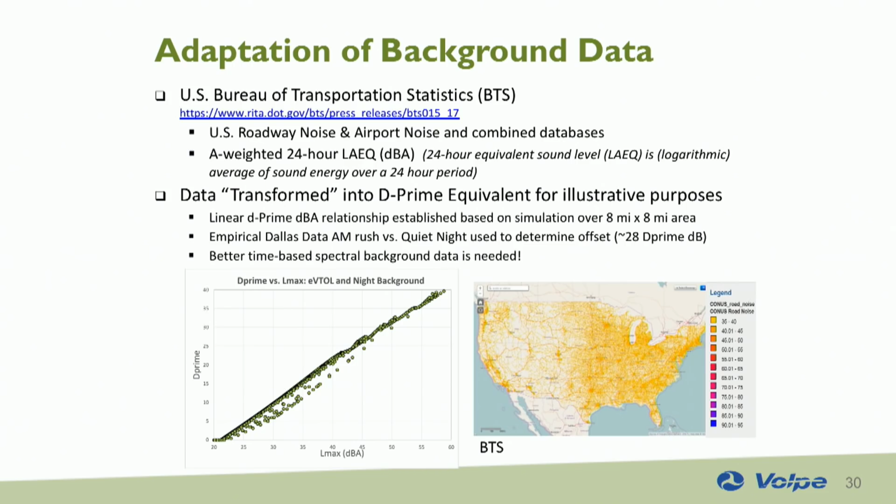So the metrics that we're looking at need to take into account background data. And for the purposes of this, I've just transformed some BTS data that we have. I won't get into the details of it, but I will show you, this is just a precursor of the video I'm going to show you in a minute. I want to set the stage and then we'll go into it.

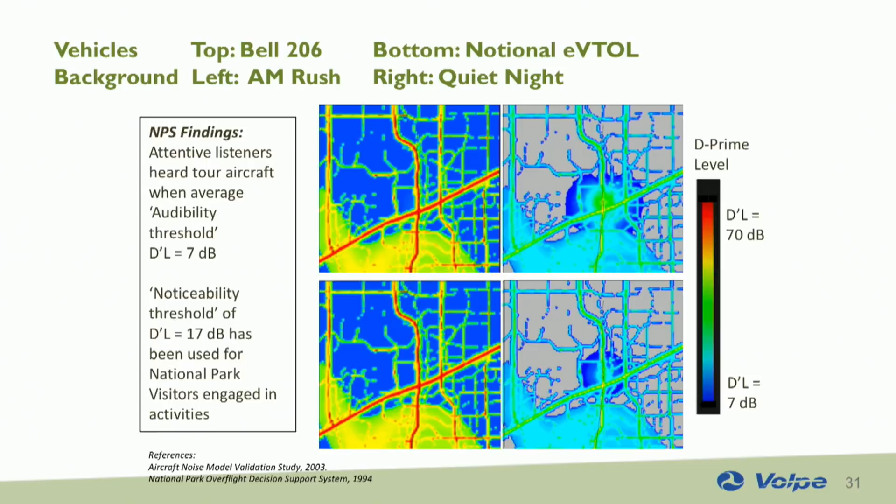All right, so you can see where they're taking off. What I'm plotting here is the audibility. And so against the higher background, on the left two plots, you're hardly even seeing the vehicle. So it's basically disappearing, both the helicopter and the eVTOL, except for that little blip in the beginning. You're basically not able to pick it up against this assumed background that I've got here.

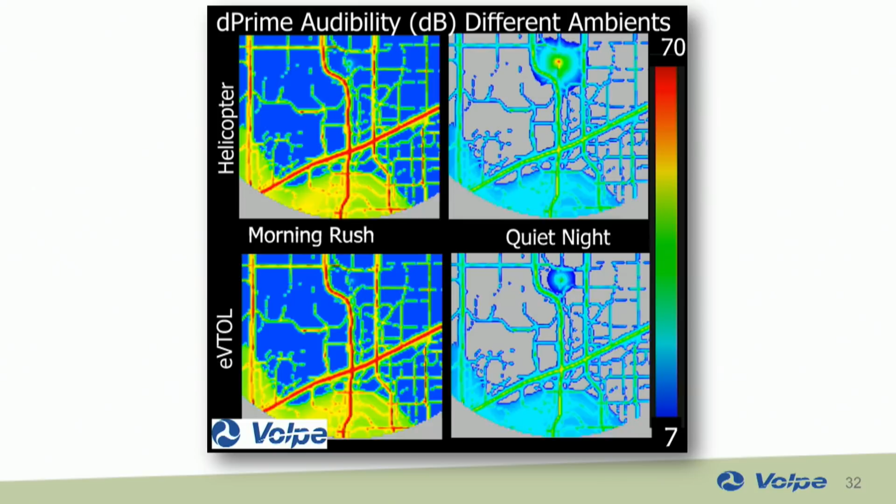On the right side, in the quiet night, you can see more of the vehicle impacting the community. So this is just looking at audibility here. Now, I've made a fair number of assumptions to go into this, and the point of this was to illustrate the tools and the types of thinking that we need to bring into this process.

I mentioned earlier we're leveraging a lot of the research foundation that is already out there. Volpe has been involved with the national parks and developing tools for prediction of audibility and understanding community response. If you think about it, in the national parks, they're trying to preserve the natural quiet. And they want to improve the experience of the visitors in the park. And there are federal mandates that they are not allowed to hear overhead traffic or air tour traffic or transportation traffic for a certain percentage of the time in certain parks.

And there's been a vast body of science and research that's gone into this, and a development of tools and methodologies for prediction of audibility. And we're leveraging this. We're bringing it into an urban construct as opposed to a very quiet national park, but a lot of the methodologies, tools, and metrics still apply.

So here I'm referring to some of the official policies that come from federal mandates, where the primary measure that they're using there is percentage of the time the aircraft are audible. And the Grand Canyon National Park's policy states that a substantial restoration requires that 50% or more of the park achieve a natural quiet. And there's a lot of research and science that defines what exactly is a natural quiet in a national park. So these are established procedures and methodologies that are out there in the federal domain that this urban kind of a construct can leverage moving forward.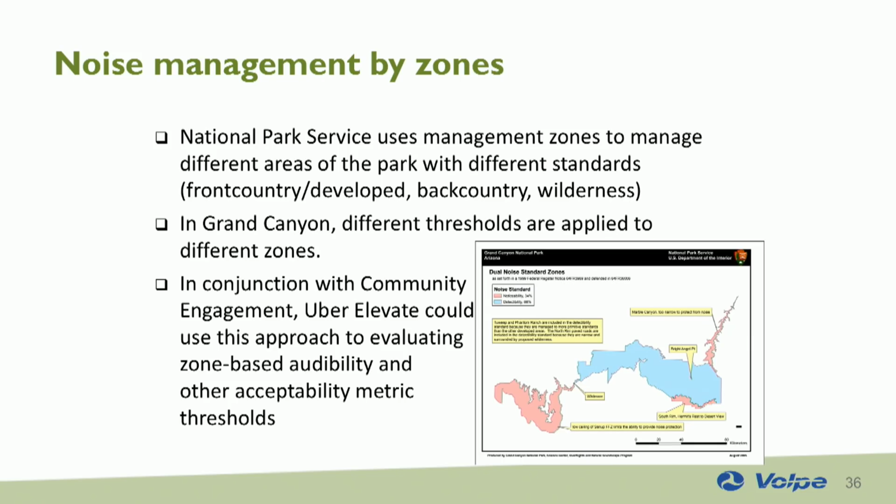Okay, so one last point I want to make is one of the other things that's been brought into the noise management in the national parks is this concept of management by zones. And they've defined particular zones in the parks that have different sets of criteria and limitations in terms of the noise and audibility. That is something that we might want to think about as being relevant to the Uber Air concept, where there could be in a particular community critical areas which are more noise sensitive or less noise sensitive. Perhaps industrial areas can withstand more noise exposure than residential areas. And so this concept by zones is an important thing to bring into mind, and we're investigating and exploring how these types of techniques can be brought into the Uber thing.

One last point, Dave mentioned the research that's going on to improve the advanced acoustic modeling. Some of the details of what we're going to be doing over the next year: we're going to be expanding the acoustic modeling to go to 1/12 octave bands, higher time sampling rate. We're going to be integrating the time varying loudness metrics into the tool. And the idea here is to be able to use this type of a tool within the design process.

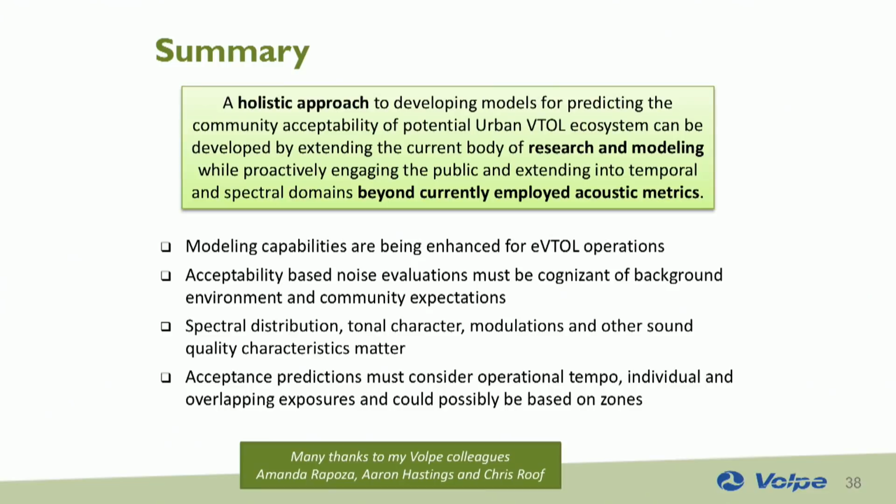Okay, I think I'm just about running out of time here. So the takeaway from my briefing is we need to take a holistic approach to looking at this. Everything from the source, its operational construct, the propagation, down to the receptor. Once you get to the receptor, we need to think about what the human response is to audibility, to these signals, the sound character and quality of the signals.

And next, I will bring Dr. Josef Schlittenlacher from the University of Cambridge onto the stage, and he will discuss that in more detail. Thank you.

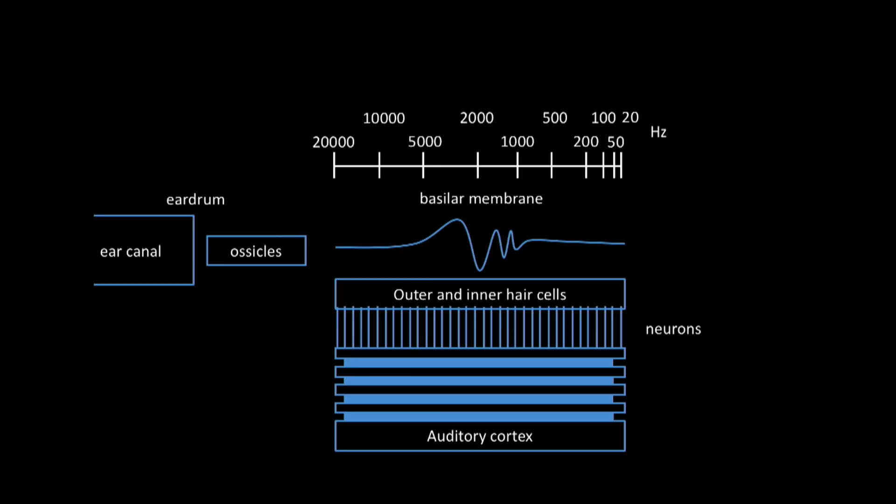Its frequency scale is not linear, not logarithmic. It's a different scale, and depending on where the membrane is excited, those hair cells cause the neurons to fire and transmit the signal to the auditory cortex, where we perceive loudness. When we model the human brain, we don't go beyond the auditory cortex, so we don't model feelings or emotions or any memory effects that you have, nothing that's individual. Everything that you see on that slide is very similar in all of us.

Why do we want to use loudness and not A-weighted sound pressure level like all those regulations? Well, because loudness models, like levels, are an objective measure. It's something that I can calculate. It simulates the average human listener. Unlike A-weighted levels, loudness considers many things of our perception. For example, the frequency weighting of A levels actually should be level dependent. And funnily, A-weighting is based on a soft equal loudness contour, but when we judge environmental noise, it's not soft, it's usually higher. So we should use not A-weighting, but B, C, or D weighting.

Loudness also considers spectral loudness summation. I've talked about that in detail last year. So let me just present some sounds. All of them have the same level. So the broader the bandwidth, it's getting louder, but they had all the same level.

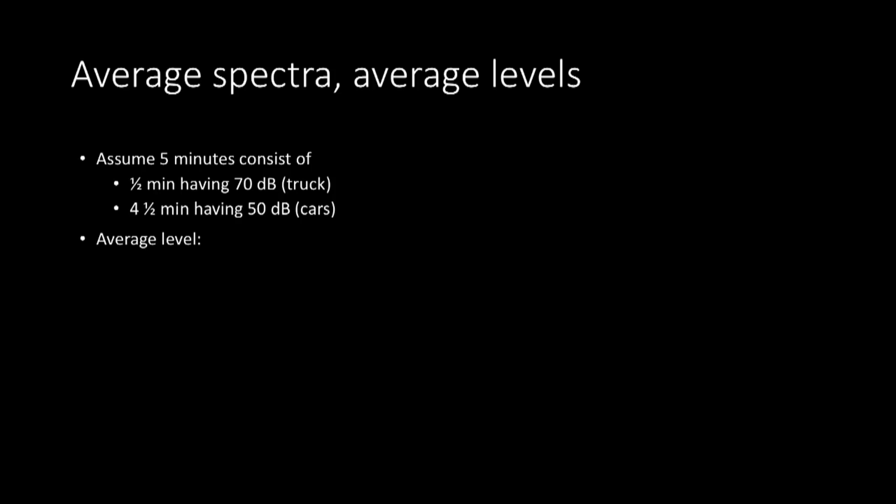Assume we have 5 minutes that we measure. 10%, so half a minute, is 70 decibels. It's a truck that passes. And 4.5 minutes have 50 dB. So what is the average level in these 5 minutes? First of all, we convert the levels to intensities. 70 dB is 100 milliwatt per square centimeter, and 50 dB is 1 milliwatt per square centimeter. We take those 100 milliwatt times 10% and add 1 milliwatt times 90%, and that is 10.9 milliwatt, which is about 60 decibels.

So what is the meaning of these 60 decibels? If we design a VTOL that is accepted in a background noise of 60 decibels, well, it's not accepted 90% of the time. On the other hand, if we use these 60 decibels to characterize the truck, well, if you wake up at a level of 70 decibels but not at 60 decibels, you will wake up. So averaging along long times is not always the best idea.

Background noise is important, as I've said. We operate VTOLs in urban environments, so we can kind of make use of that background noise to hide the sound of our VTOL. I have created 2 examples, not of actual vehicles, just for a demonstration.

Assume we've put a lot of money, time and effort in designing 2 sounds that are 14 decibels below our urban background noise. Vehicle A is just a constant noise. It sounds like that. And vehicle B is a simulated helicopter. It has the same long-term spectrum. I just applied a windowing function so that it has these pulses.

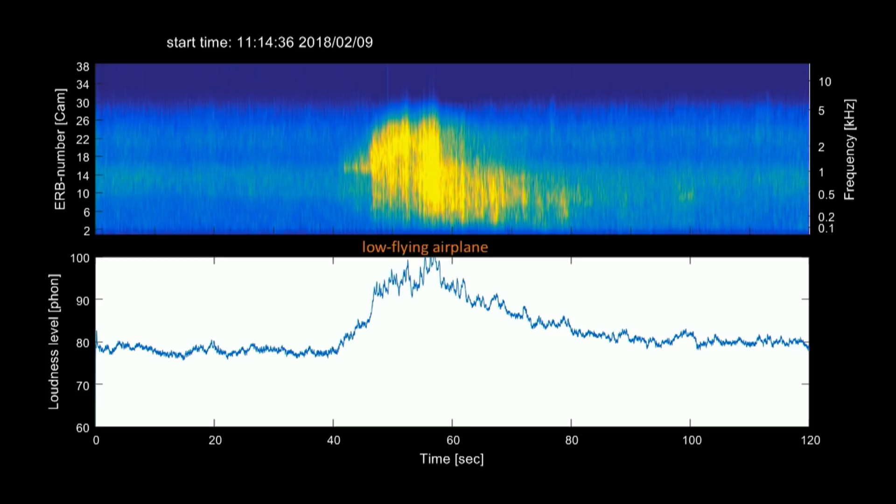One interesting thing that you can see, you can hear the low frequencies for a longer time than the high frequencies. That's because of the attenuation in air and partly the directional characteristics of that jet. One more example, here is a somewhat distant helicopter, it tries to hide at the frequencies around 500 hertz to 1 kilohertz, but it's a little louder, and it's not constant, so not ideal to hide in urban traffic noise.

All these examples that we've seen are nothing that we want to use as a reference. In the white paper, Uber stated that a VTOL should be half as loud as a medium-sized truck. Let's look at trucks. Here we have large trucks on a very busy highway, and what's characteristic for all of them, there is a component around 200 to 300 hertz that's always clearly audible. Here an example for a small truck. And this small truck has the same characteristic.

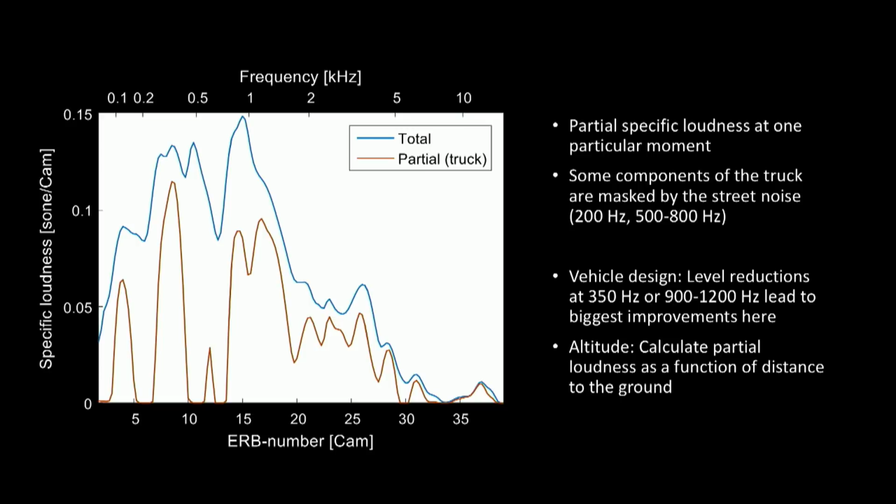So this truck is already inaudible around 500 hertz. So if you improve your truck around 500 hertz, well, it would still be as loud. If you want to improve your truck, that image shows us we should improve around 350 hertz, where we have a peak, or again at 1 kilohertz. If we reduce the level there, then we get it much softer in urban background noise.

With our VTOLs, we have more options. We could simply fly higher. That reduces our high frequency content at the receiver position, but of course there are regulations, and there are not that many degrees of freedom to just fly higher.

Loudness is a pretty complex model, so we have to consider how often it has to be calculated for one receiver. As far as I understand Uber, we are not just interested in calculating it for one microphone. We are interested in predicting the 12 million receivers that live in the LA area. So for one calculation, we should not spend too much time. So we can apply some signal theory: how often do we have to calculate it?

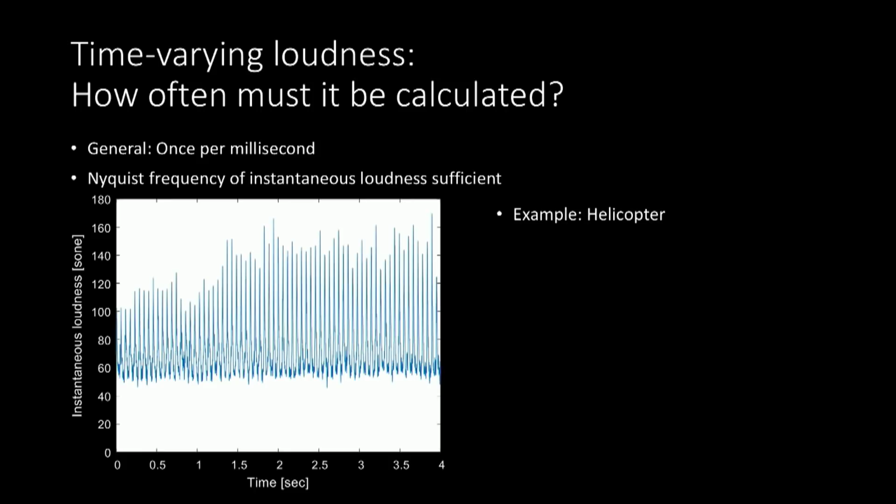Here is a helicopter. It has one pulse every 57 milliseconds. And if we are smart, then we could say, well, we have to calculate it twice as often as these 57 milliseconds, at a rate of 35 hertz, so each 29 milliseconds.

That's sensible because when a vehicle passes by, it needs some 5 seconds, which corresponds to a frequency of 0.2 hertz. So for road traffic noise, we don't need to calculate loudness that often. We don't have to record it that often, which is pretty good, because when we place our microphone in the city, we might accidentally record speech and violate your privacy. So if we average across several seconds, then you can't extract speech.

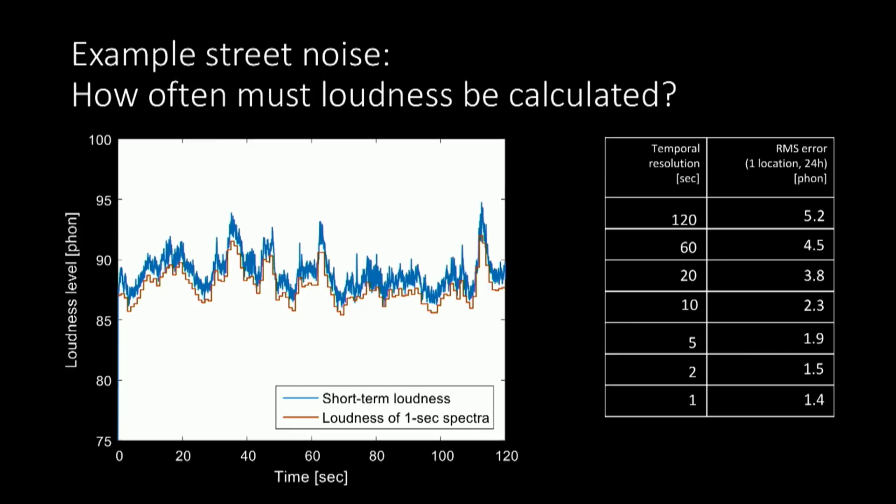Of course, it gets better when you increase the resolution, and the error that you make here is basically these very short-term effects of short-term loudness in the millisecond range, but we can deal with them statistically. So if we measure road traffic noise and average across a few seconds, then we can still use that background noise for our predictions. So what predictions can we already make?

Well, we can already use it to calculate the partial loudness of a VTOL, or of what you expect from the sound of your VTOL in urban background noise. We can use that now to optimize those VTOLs to make them quieter in our cities. If we are not a manufacturer, but the operator or buyer, well, if you have a choice between two vehicles, you can just use the one that has a lower partial loudness.

Or you can compare your vehicle to a motorbike, truck, or whatever you want to compare it to, to see how we merge into that urban soundscape. Do we make the sound of a city worse, or is it still acceptable? And what's really great is using loudness, we can predict how many people can hear a VTOL. And I think that's a much better number than just saying that sound has 75 dB.

If we say, well, on this route with that vehicle, 8,000 people can hear this VTOL. If you use another VTOL, 12,000 people can hear it. So you have a clear measure of your acoustic cost, telling you how many people can hear it or how many people hear it at a loudness that is still accepted. So thank you very much for your attention.